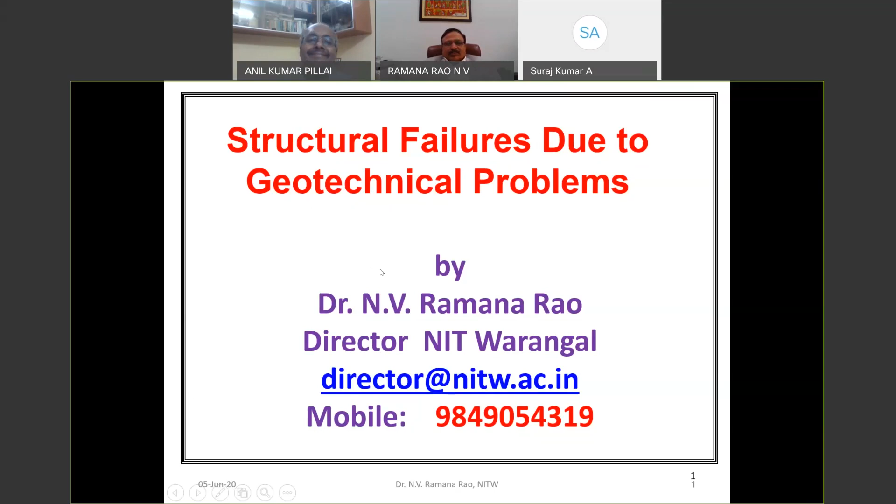So now when you say failure, generally we should all understand that it is the inability of a component, structure, or a facility to perform its intended function. So the moment we say failure, it does not necessarily mean that it involves collapse or rupture. Even if the functional requirement is not met, it is called a failure.

So when you come to civil engineering geotechnical, you can classify many failures, but as a part of my lecture, I have classified them: ground shaking, which is due to earthquake, shaking structures constructed on the ground causing them to collapse; liquefaction, which is conversion of formerly stable cohesionless soil to a fluid mass, causing damage to the structures; landslides, which are triggered by the vibrations; retaining structure failures, the damage of anchor walls, sheet piles, other retaining walls, and sea walls; and then settlement. So my lecture will be confined to these types of failures.

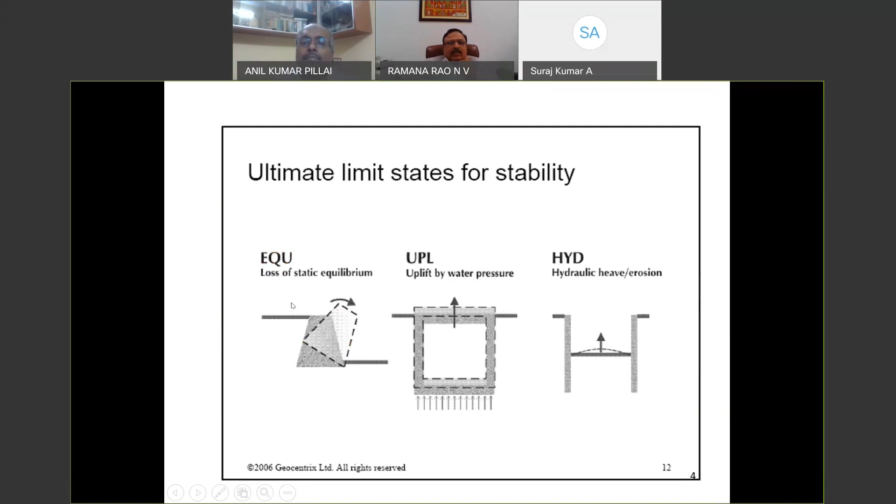So let us go to simple theories. We all know, but just to brush up some basic things. When we say ultimate limit states for stability, we have the equilibrium. So when there is a loss of static equilibrium, then you get a failure, or when there is uplift by water pressure, that is also leading to failure, or there is a hydraulic heave or erosion, which again leads to failure. Then we have the ultimate limit states of strength, the structural failures due to internal failure of the structure, cracks and all that. And then there is a failure of the ground, slipping of the cone and all that. So generally, these are the categories of failures that one encounters.

So before we go into the actual failures, I would like to throw some light on some historic failures, because these have given an opportunity to learn from failures. These are lessons for all of us. Most of us know them, so I'll just repeat it for the sake of continuity, but these are very historic failures and they are very important for any engineer to know. The first one is the Leaning Tower of Pisa. Most of you have heard about it, may not have seen it. This is a very famous failure.

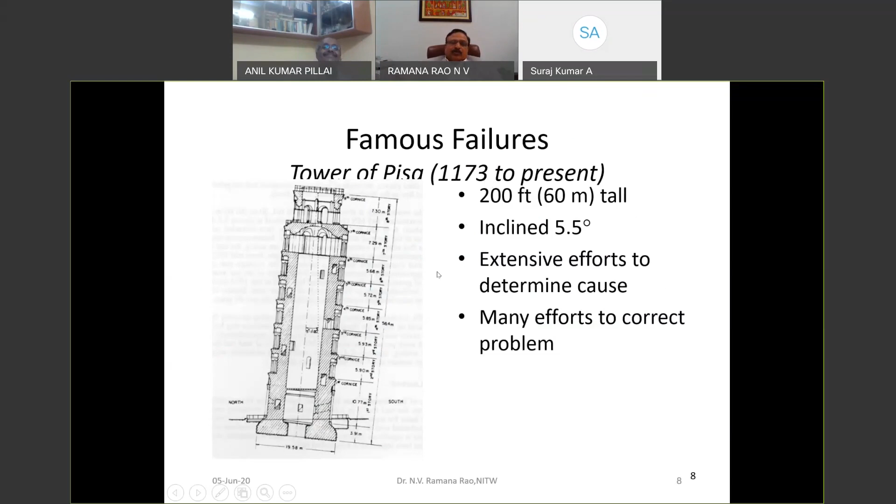This was in 1173 to present. It's 200 feet, about 60 meters. To be exact, it is 56.7. And it's inclined right now at 5.5 degrees. So extensive efforts to determine the cause and many efforts to correct. In fact, this particular problem itself has produced more than 100 PhDs worldwide. So the problem has created opportunity for many of us to investigate and think. So if you see, this is how it looks in the present form. A beautiful structure.

The evidence: the tilt of the tower was first noticed during the initial phase of the construction itself, which began in 1173 AD.

The detailed investigation has shown the soil profile, and there is a tilt because of certain changes in the sea level and the soil profile. Subsoil profile and soil properties, and all these investigations are made because as engineers, when something fails, we should not leave it like that, allow it to collapse, but we should go into details to find out what is happening, why it is happening, so that we can actually make it safe for future structures.

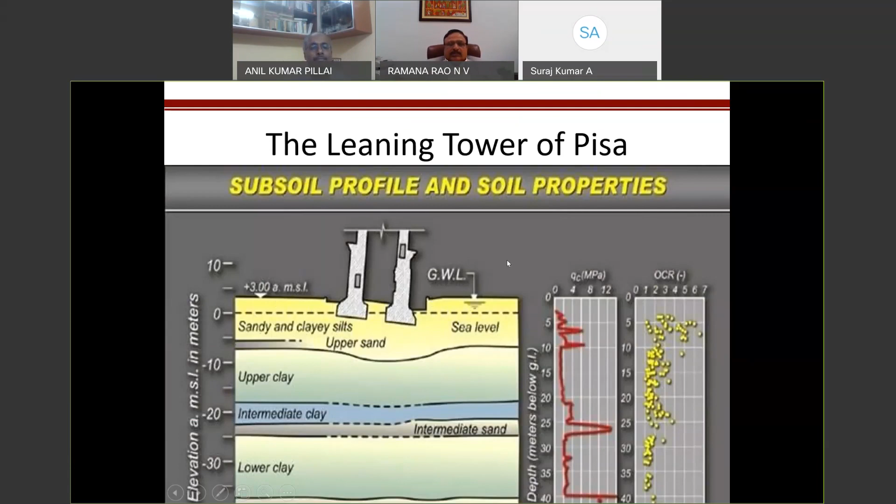So this is how it looks in its full form. This is one of the failures which is like a lucky failure, because normally failures lead to a lot of criticism, but this is one failure which has attracted tourists, and it has become an opportunity for the government to earn a lot of money. This is a lucky failure. Many of the failures are not so lucky, but this is a lucky failure. And you see a lot of tourists come, and the photographers take photos. So this is a very busy spot, and it is worth visiting.

But actually, the engineering says something about the subsoil profile. Then we have the normal failures because of earthquakes, how the ground is shaking. This is another famous liquefaction ground failure because of an earthquake. You see the amount of soil movement that has caused, because these are all historic.

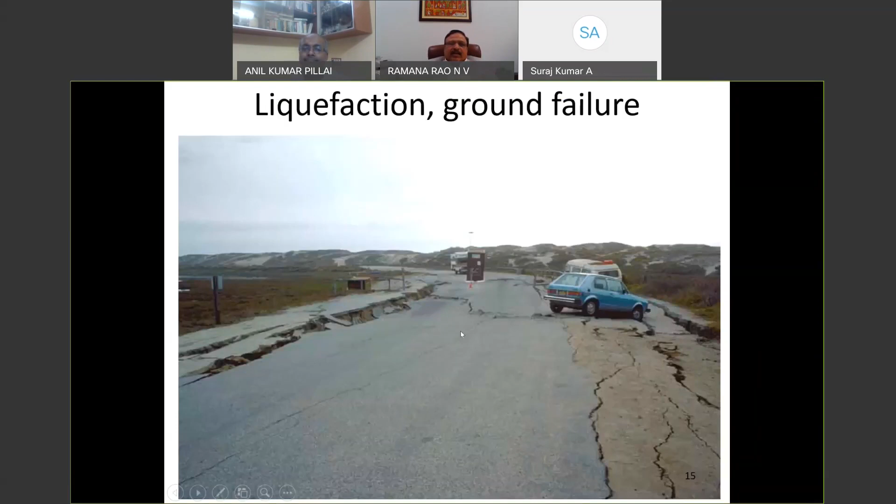Many of you might have already seen it, but I still thought, for the sake of completeness of the lecture, I would like to show this. So this is how there is lateral spreading in the soil beneath the embankment, which causes the embankment to be pulled apart, producing large cracks down the center of the road.

So the cracks are so big that sometimes a car can go inside. Sometimes suddenly there's an earthquake, you're driving, and you may go inside the ground. So you have to be careful, especially...

Very recently, due to liquefaction of the foundation soil during the Kocaeli earthquake in Turkey on August 17, 1999, which was magnitude 7.4, it's lucky that this building has collapsed but not touched the other buildings. Sometimes, especially in our cities, the buildings are kissing each other, and you can imagine the situation where one building falls on the other, and what will happen to somebody who is not even aware of what is happening.

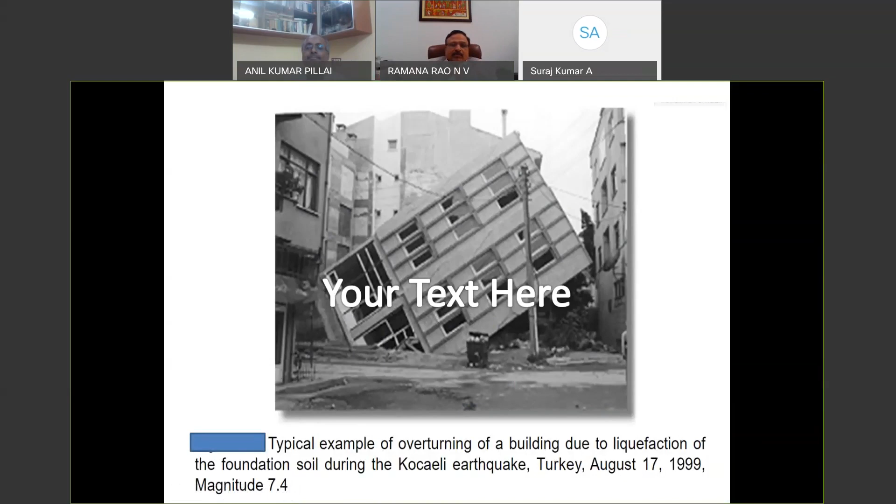And sometimes we come across cases where the foundation is not aligned properly, and then you end up in a situation—these are all real pictures, not animated—where you have to figure out how to solve this, how to build them.

Many times, I had the opportunity to visit the Channel Tunnel during its construction. This Channel Tunnel, which is a tunnel under the sea, from the UK side and the Paris side, they approached from different sides, but the alignment was so perfect that they met with not even a 10 mm difference in the alignment. So alignment is very, very important.

And these are some of the punching failures of the foundation leading to collapse, and other lack of proper investigation leading to failure of many of the bridges. So very, very important—every aspect of engineering is important.

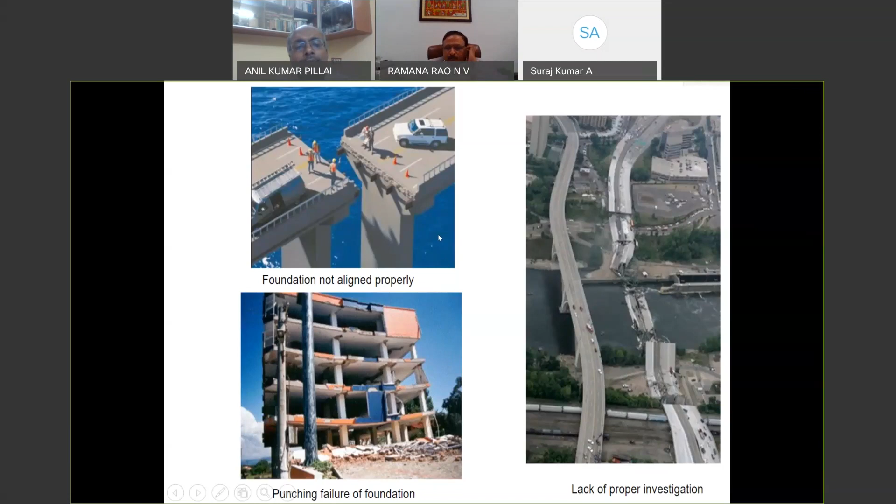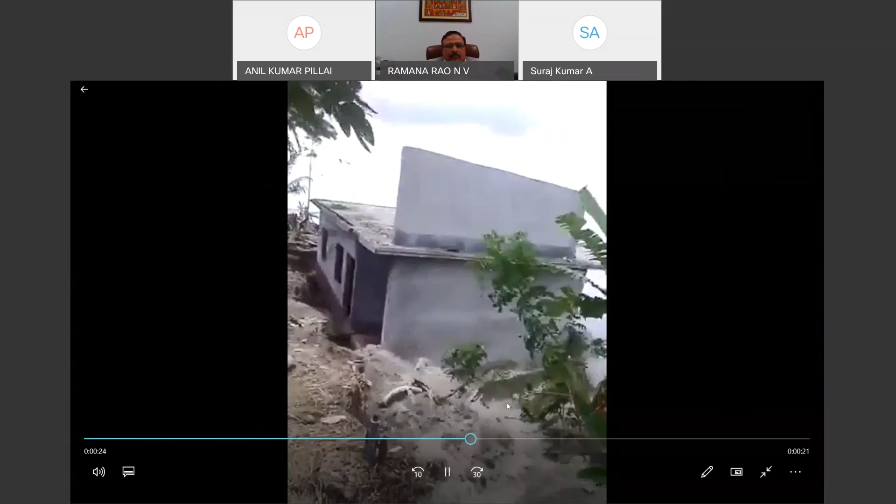Then you realize that nothing is there at all. So that is how we have to be prepared for all these. Don't build so close to the water table, and we should be aware of water table fluctuation, because that is one major cause of failure.

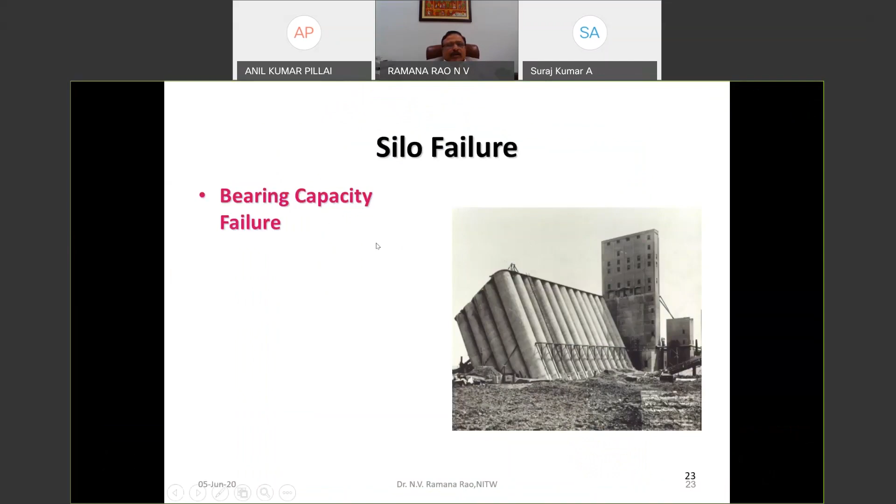This is another historic failure which is taught everywhere. It's a silo failure, actually a bearing capacity failure. If you see the probable sliding surface, this is how it is, and this silo failure is because of inadequate bearing capacity. So this is a typical example of a bearing capacity failure.

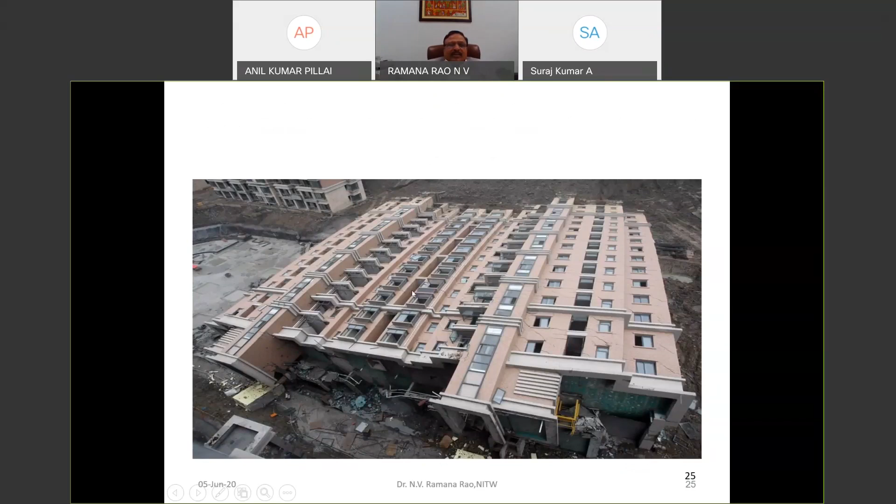And of course, this is another famous failure in China, where the building just collapsed. This is how it looks, a tall building that collapsed. The fellow at the top, if he wants to come out, simply has to jump out. So that is the situation, you see he is not aware. This was a typical building; other buildings are safe, same design, everything, but this particular building collapsed. So proper investigations were carried out.

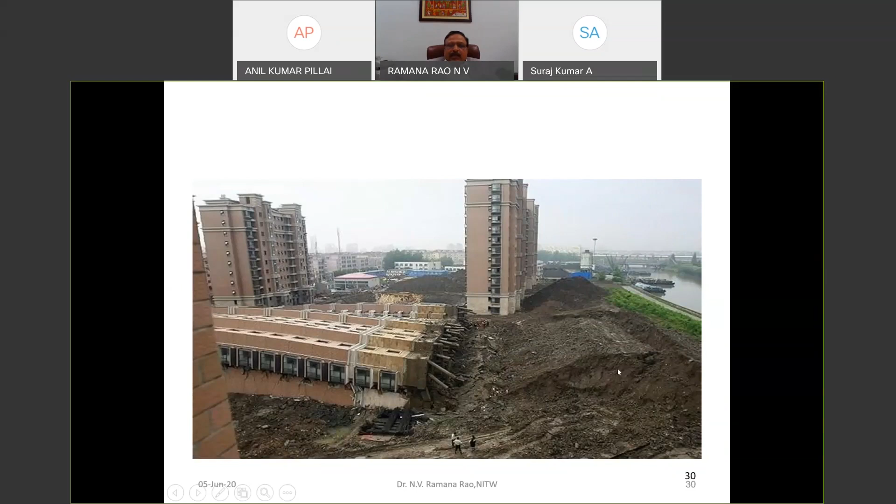When you do a close investigation, you find the foundation system, everything is fine. But there are some reasons which you have to be very, very careful about. This is the collapsed portion of the piles and other things. Here, the important part is the excavated material dumped here. So what really happened in this particular failure? Let us see, this is how it looks.

So let us see the failure pattern. This is how the arrangement of the foundation system is. Here there was a canal that was excavated, so they excavated all this material and dumped it here. This created additional surcharge, and on that day heavy rain came. So the surcharge started exerting pressure on the piles, and finally the piles cracked here. After that, immediately it broke and then fell. So that is how the failure took place.

So there are some things we are not aware of. When you are inside, as engineers, we should tell them every aspect is important. Even a minute mistake will create a huge problem. This teaches us many lessons, and it is recorded in many textbooks now because it's a famous failure. We should be careful not to just dump material anywhere; we have to take care of the engineering aspects of it.

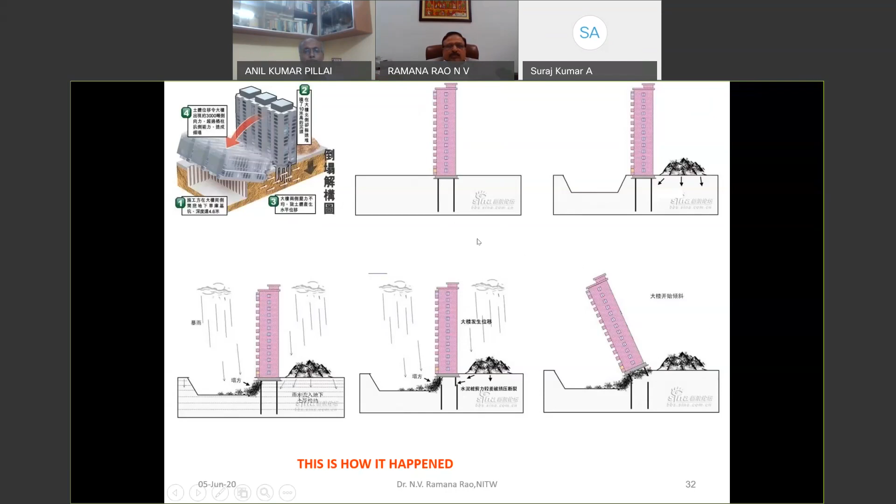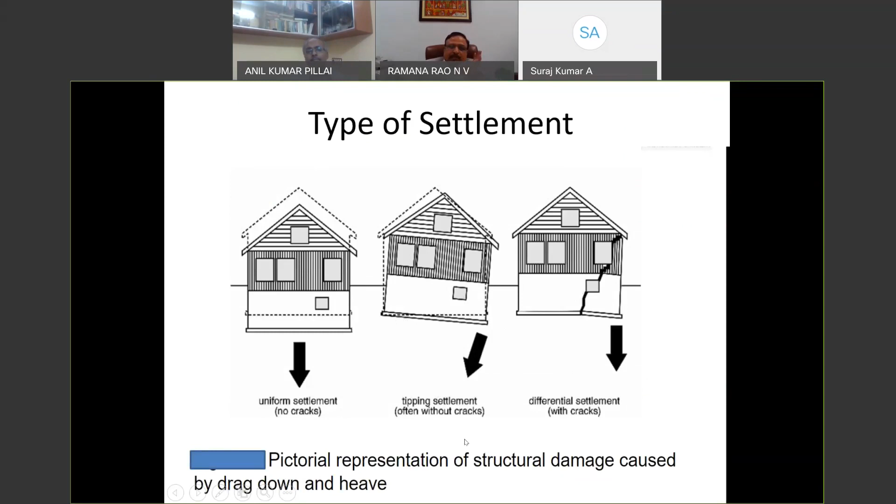This is a pictorial representation of how settlement causes damage through drag down and heave. This is only for illustration purpose, because I am addressing an audience where some are students, so I'm trying to go to the basics, because it's always better to revisit some basics which will help refresh our knowledge.

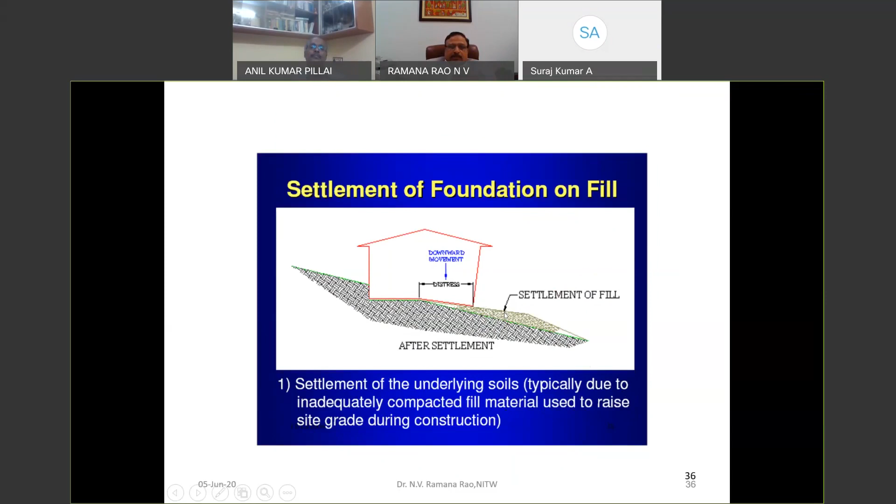Settlement is something very, very critical. Settlement does not come immediately - you feel you are compacted properly, but once there is a fluctuation in water levels and weather, then settlement of the underlying soil, typically due to inadequately compacted fill, is a common problem during construction. So compaction of the backfill material is also very, very important. Many times when we design, we make an assumption - this is our assumption in the design.

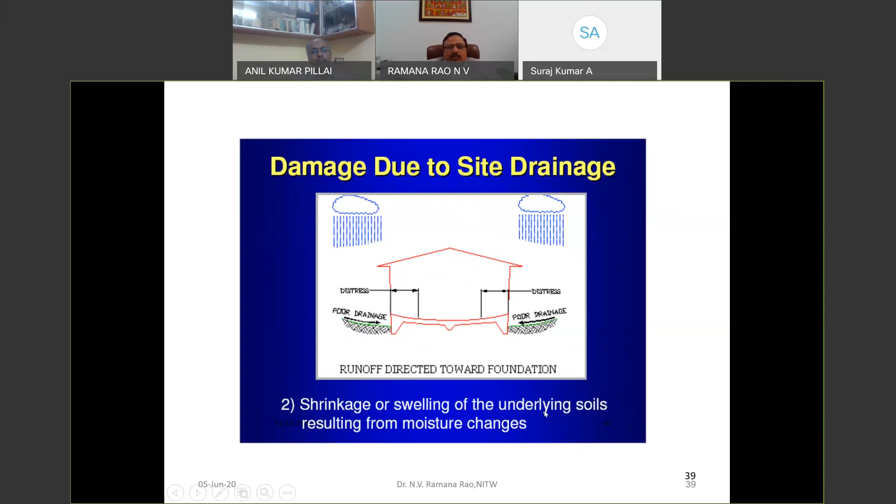The shrinkage or swelling of the underlying soils resulting from moisture changes is something again. Many times you find building damage due to trees planted very close to the foundation. Today is World Environment Day, and I say don't plant trees, then people will come back firing at me. But I'm saying plant trees, just away from the building so that the roots do not disturb the foundation.

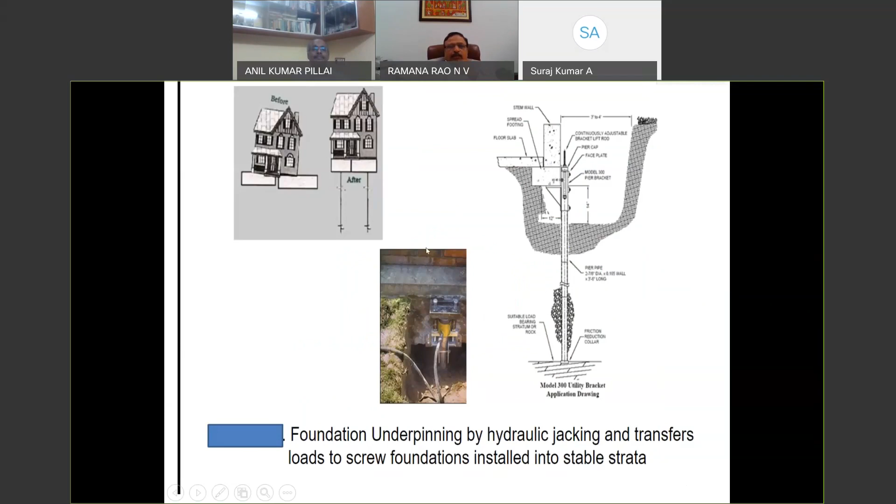These are some of the cases which I have dealt with as a consultant. Whenever there is a failure, they call me - so they call me the crack professor. Whenever there is a crack, they call me, so I go there. This is a settlement of the floor.

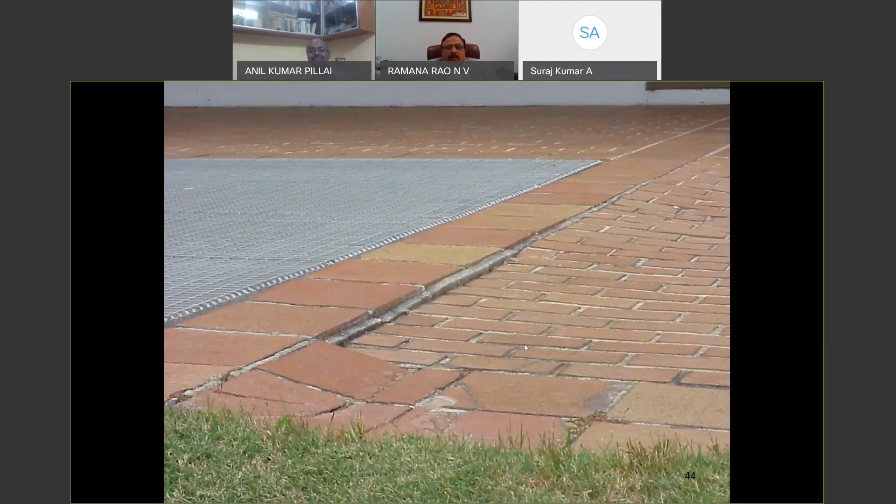This is how the floor has settled, and they don't know what happened. This was after huge rains. Luckily, the designer has taken care that the foundation and column are proper - it has not settled, but the filling of the pavement and parking lot clearly shows obvious movement. Anyway, the building is safe, but the moment something happens, immediately all the residents come out onto the street and start shouting. This is something which can be easily avoided had proper compaction been done.

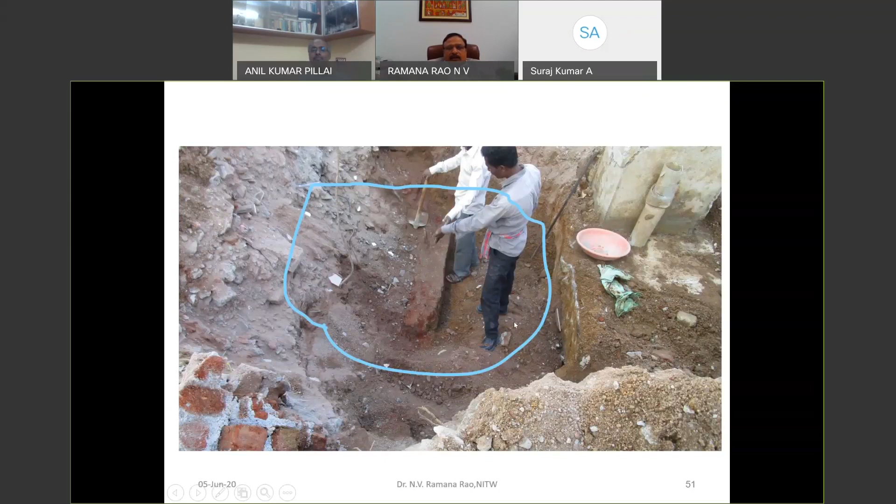Then there's Nanakramguda, another place in Hyderabad where there was a failure. This was a 4 or 5 story building, and I was asked to investigate. I found that they had a sump built with brick wall very close to it, and this sump always used to leak, so the building was totally wet. The more deeper you go, you realize there was a bore well which had gone to the foundation. These are all engineered buildings, but the site engineer never visits, and the designer never visits the site.

This is how the foundation was built, because this adjacent property belonged to somebody else. So this is how our execution happens, and nobody bothered to visit. Finally, structures don't listen to excuses - they behave the way you construct them. And that is what happened. It collapsed, leaving half columns and half structures, and several people died.

Many times we need to make sure that we tie the reinforcement, even in the foundation - this is a typical example for illustration purposes. If you don't tie, what is going to happen? And if you tie, how does stability improve? So to increase stability, always tie the stirrups all the way down the column.

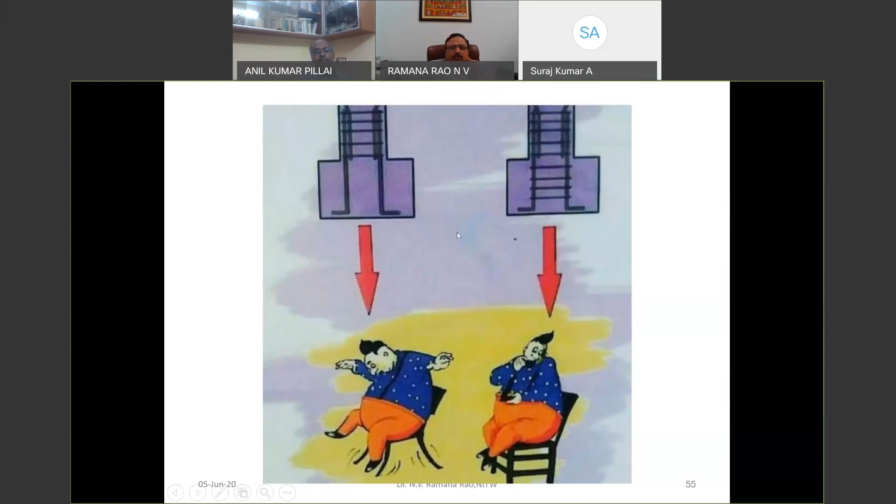See, what is there in theory and what is there in practice is a big gap. And we as engineers have to make sure that this gap between theory and practice is bridged. There's a saying on civil engineering sites: weep holes never weep. So we have to make sure that weep holes weep by properly grading them, because the purpose is to relieve the pressure. Otherwise, you will see what happens.

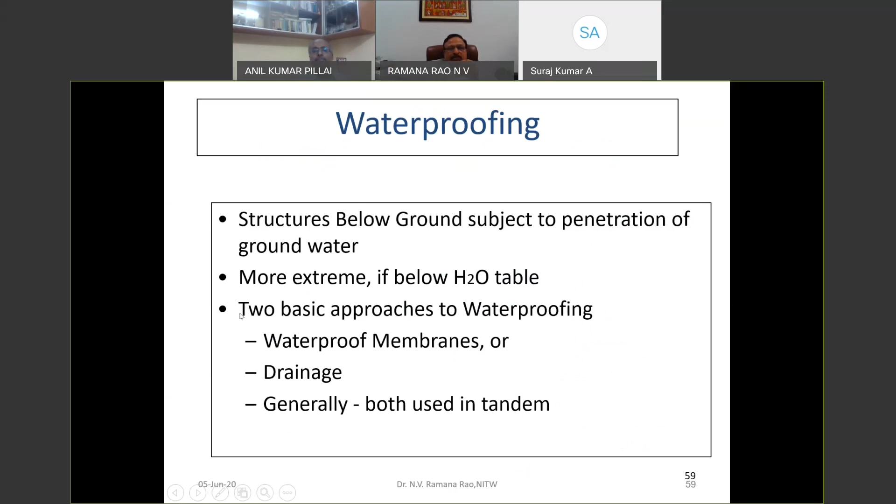Then there is overturning, and you have other mechanisms to prevent it. Waterproofing is also very important. Sometimes we ignore it, but structures below the ground subject to penetration of groundwater will require waterproofing. Two basic approaches are there. Several technologies have come now, so I don't want to go there, but this is a simple way of doing it. Because we are now going for very deep cellars, we require these retaining walls, but we also need to take care of the other side to prevent any failure. Proper drainage should be provided so that there is no saturation creating problems in the cellar portions.

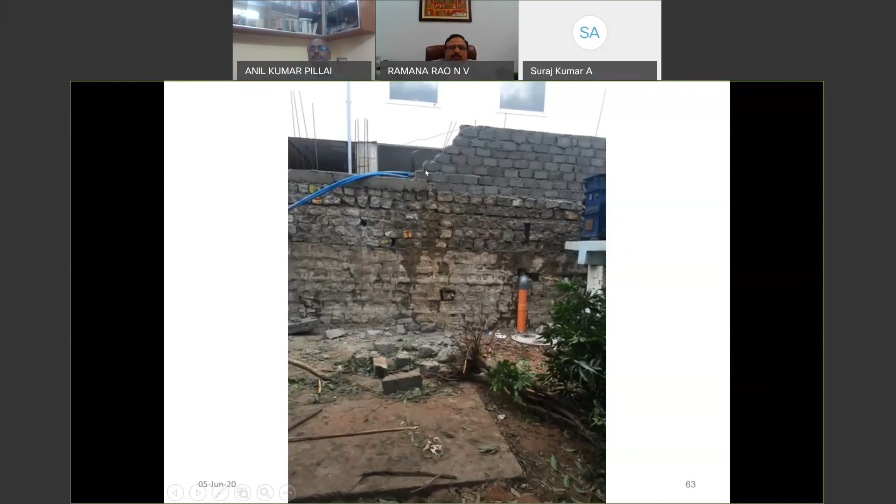These are some of the materials that you have. Now I'll tell you about a retaining wall failure. This area belonged to somebody, and they had a newly constructed building on the other side, which you can see. When they were doing the parking lot, they dumped all the material on this side without realizing that this was originally a compound wall. It was not a retaining wall. And as the excavated material increased, they increased the height with a normal wall.

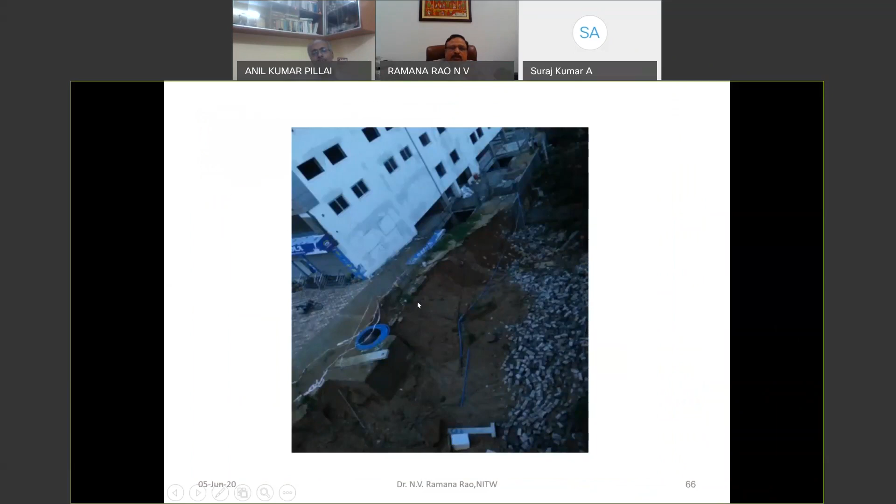This is how the top view looks. So we have to be careful about how we are constructing. Site visits are very, very important at every stage, and we should not do things arbitrarily. This is the case study I was telling you about, the collapse of a retaining wall at the minister's quarters. Minister's quarters are supposed to be very important, and everybody takes care; a lot of visits had been done. This is how the collapsed portion looked. You can see the huge crack.

See, this is what I'm telling you. Huts are built immediately. There is a wall they get free of cost, so they build huts adjoining it, and you can imagine the situation of the hut in the middle portion. Obviously people die, it creates a lot of controversy, and this is what happened. Here the fault was with the designer, because he had used a shelf technology and his assumptions were wrong. He thought the shelf would prevent overturning, but the compaction was not proper, and there was a gap between the shelf and the soil, so cantilever action came, and wherever the shelf was there was a huge crack.

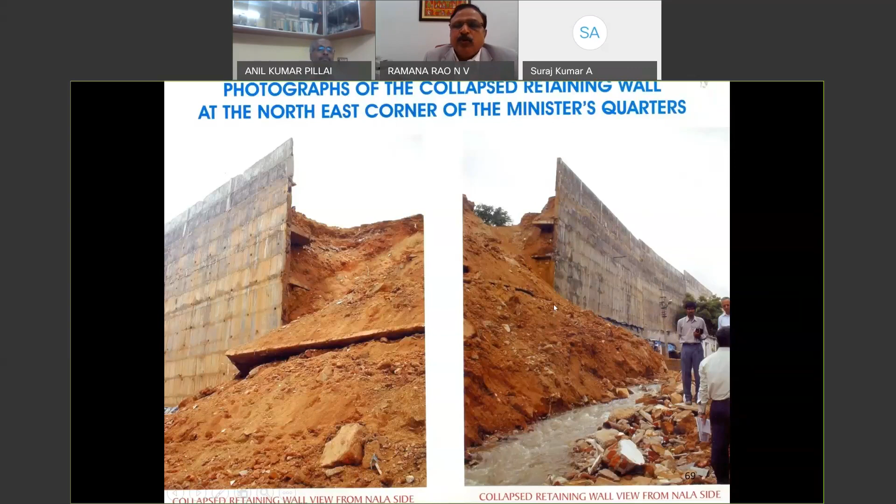The weep holes were there, but they never weep. You can see the weep holes are shining; there is no indication of any water leaking. And all these problems come up only during huge rains. This is the closer view. Everything was filled with very good soil, but failure still occurred. You see, these are the small weep holes. Sometimes they are blocked.

But the adjacent old wall with this sort of arrangement never failed, because the water seeped through it and went away smoothly. The one built with RCC failed. After that we did a lot of forensic engineering; here I am standing and watching, and then we gave some reports. Everything is done systematically, but the basic assumptions of design should be met at the site.

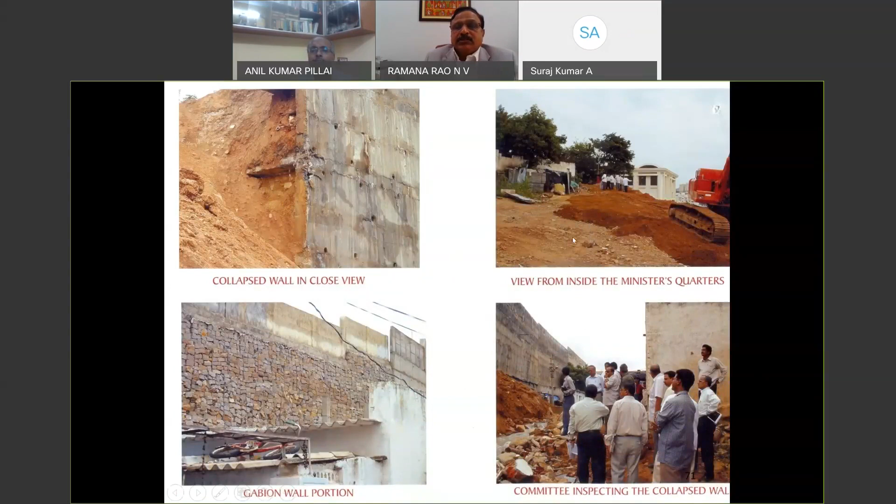Otherwise, your designs may create huge havoc. So these are some of the other views. And then we do a lot of investigation, inquiry. So this was a huge amount of filling. And what happened, unfortunately, they have taken care here, and here they built a wall, as a compound wall for the ministers. So this compound wall is about 4 meters high.

So all the water came and collected over this. So you had a 4-meter pond on this wall, and that created additional surcharge and lateral thrust, and led to the failure. Actually they had holes, but the residents below, every time the water used to fall on them, plugged it with some mechanism and prevented the water from seeping out. And this has led to the failure of the whole retaining wall.

So this is again a design assumption mistake and other things. And then we do analysis, we do all the system. We now have software where we can do detailed analysis of why it failed. But everything, the reinforcement, everything was perfect. But then the construction problem was there.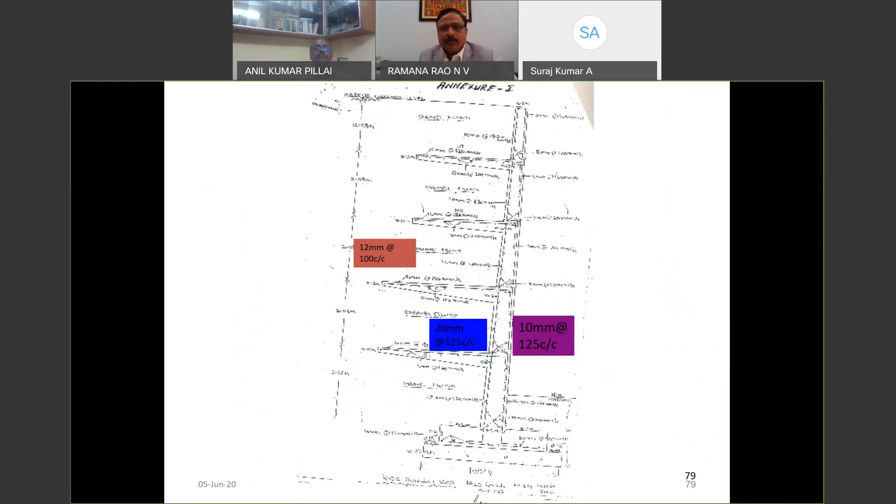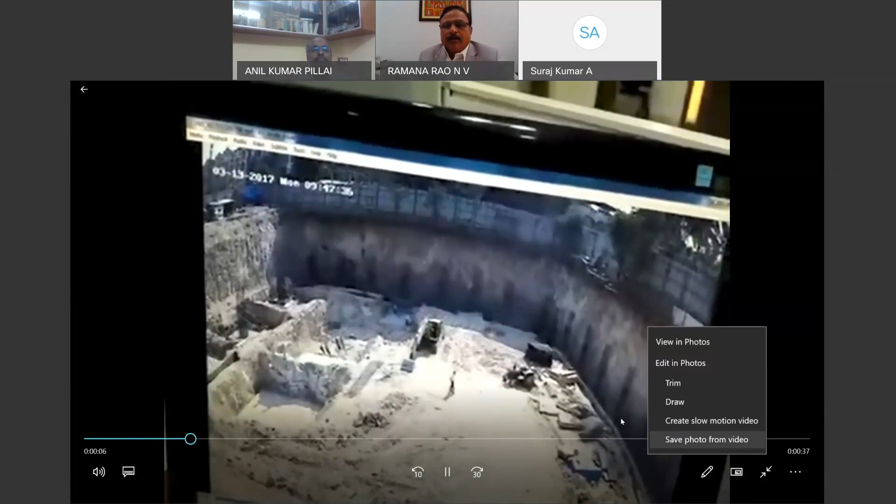And I'll show you the sequence of the failure, how it looks. So the video comes. So just see this corner, the corner on this portion. This is the portion that actually needs to be watched. Just see the corner, you see how the whole thing has collapsed, and this collapse has led to the failure, and the people who were there.

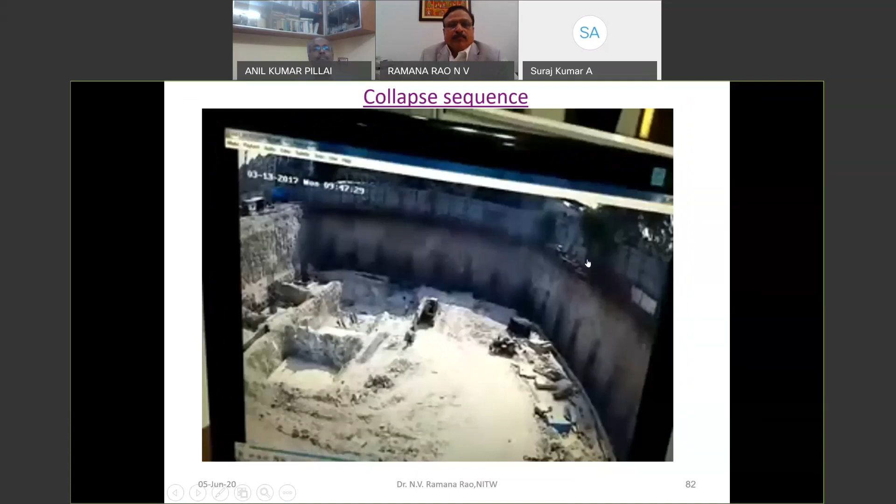So let us see how it actually happened. So this is how the collapse looks. And then, as you go on, it looks like this. On the top side, there is a road. They dumped a huge amount of steel, huge weight, concrete, all the material was dumped there. And immediately on the road, there was a horizontal crack. This itself is an indication that there is a movement of soil, but nobody observed it. Nobody bothered to actually make a note of it.

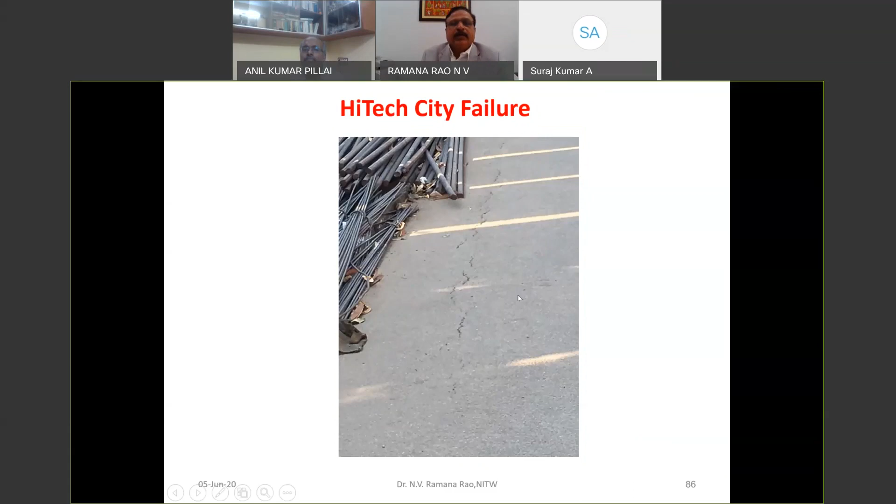And then you see, this is another example of how they have taken care to prevent failure of the retaining walls. See, in the previous case, the soil is very good, but still it failed. So normally, when you're going very deep, you need to have proper measures, because the contractor is always interested in profit, and he ignored some of the basic steps. So the engineer should insist on such things, otherwise it may lead to failure and give a bad name to the whole engineering community. Now, this is another example of a situation where you have a

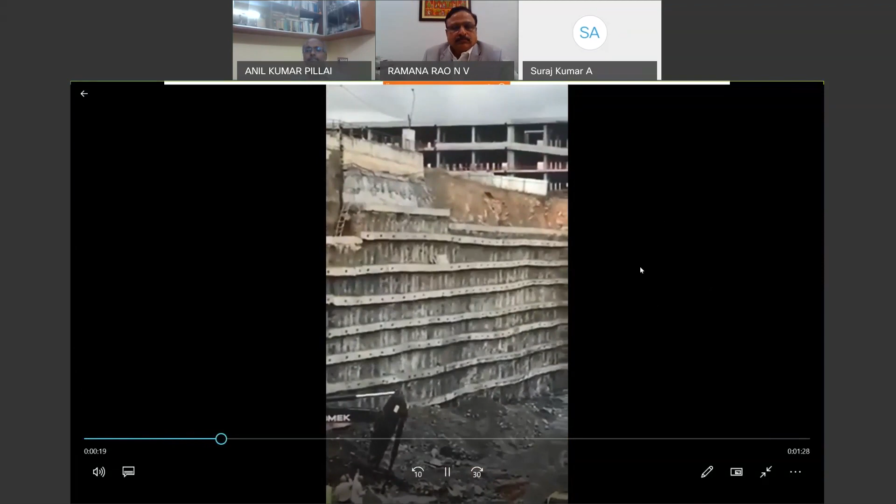this is a failure. Just observe the failure at this portion of the wall and how it led. Everything is there, the retaining wall is there, but it has led to the failure. Just see the amount of damage.

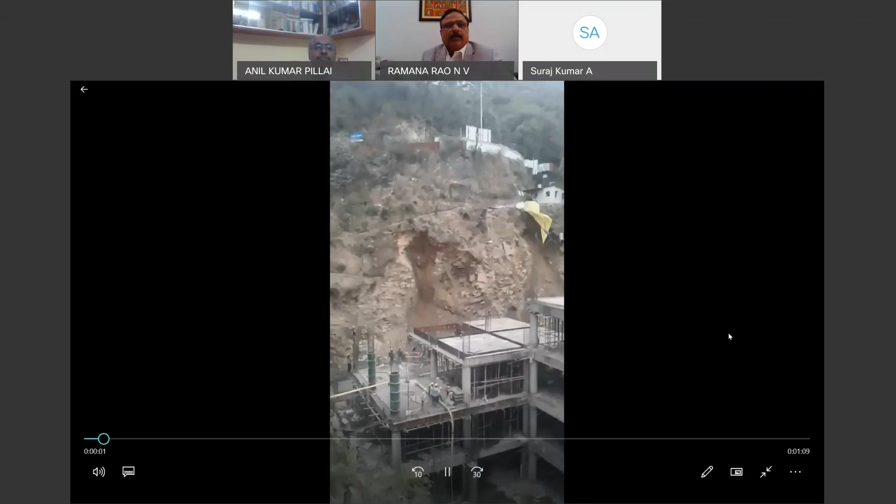So what this example shows is that even if you do it properly, and they have to do it properly, this particular failure damaged the buildings on the upper side also and led to many things. So you have many examples of such things, and landslide is another common thing. Of course, here we don't have to worry, but in many other places we have landslides. This is another example of a landslide. You don't imagine it, but you can see the effect, how the buildings have failed.

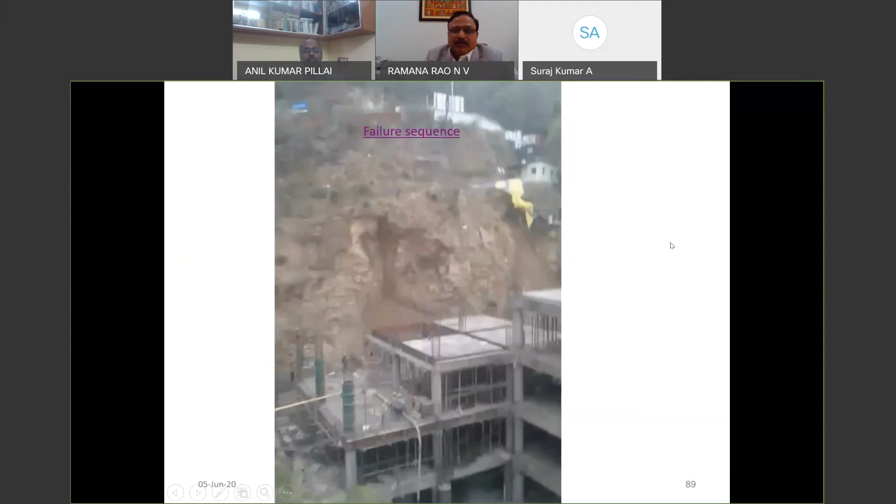So some of these cases are very scary, but this is how things are, and you can see how a landslide can create havoc for buildings. So you have to be very careful the way you put it. You have to make arrangements. So this is another failure which you don't anticipate, especially on hill roads, and how it fails.

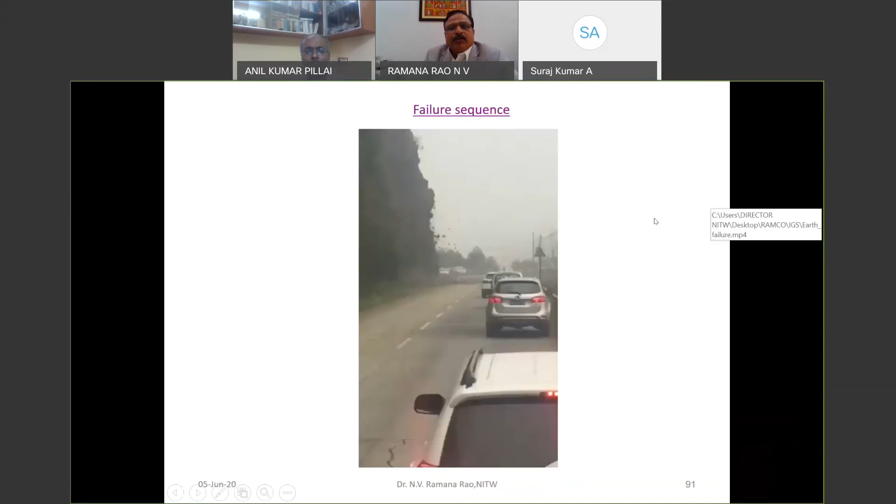Then one more failure I wanted to show. You see it, but you see the impact of it.

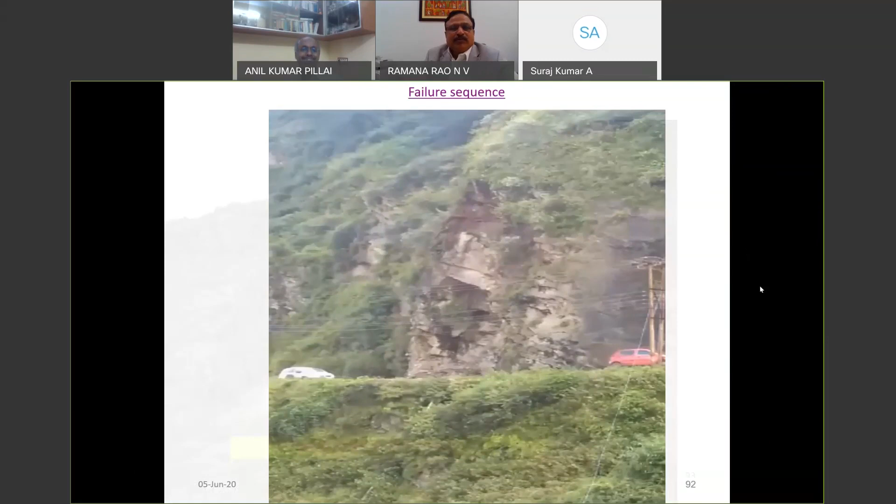We have to be careful. I don't want to scare you further with any more videos, but okay, this is another example, where we try to break the rock, and when you are breaking using explosives, you are creating unstable rocks after blasting. So this is a very common problem.

So we had one such system in the Durga temple in Vijayawada. With the rock, we had this sort of arrangement. Later, we tried to come out with a system with one of the consultants to do anchoring and stabilize with the help of a mesh. And today, this is how it looks, pre-stressing the cables and holding. Using some of the concepts in structural engineering, we have stabilized these rocks, and today it is very stable.

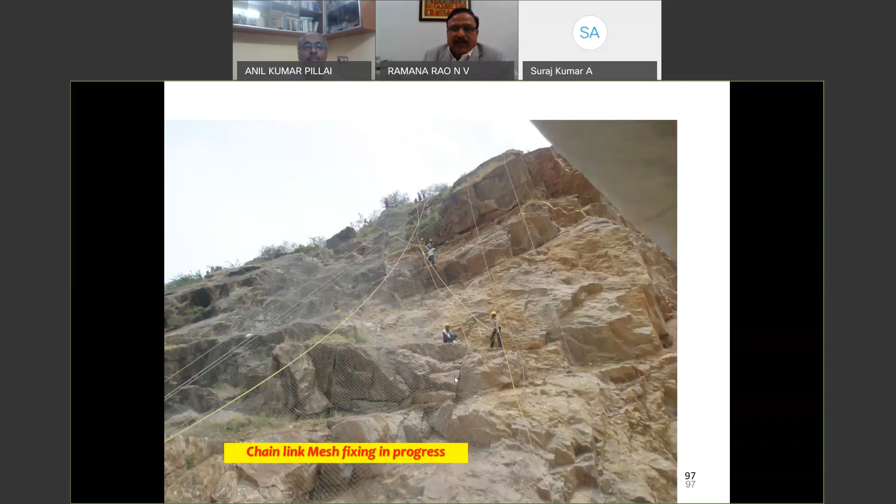This is how it looks. I don't know whether you had a chance to visit. These are also pre-stressed cables, and it's perfect. It was done about 10 years back, and till today, in spite of several things, heavy rains, nothing has happened. So we need to think of innovative solutions to solve and make these things work.

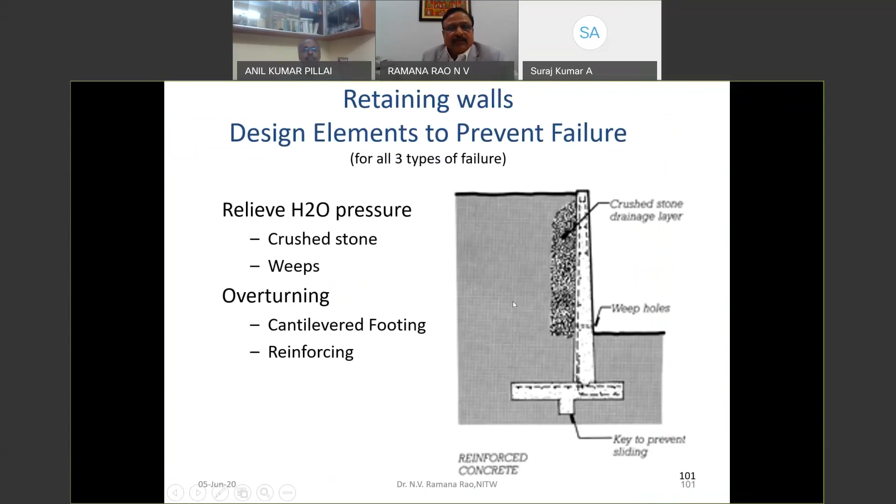This is the hill where it goes to a temple, and imagine that failing. So we have to make sure that we take care of all the important things, otherwise we lead to problems. So the type of retention system that you design should depend on how close you are building, what is the type of soil, what is the water table level, whether it is temporary or permanent, or what is the contractor preference.

Because there is a cost which may not be included in the estimates, and many times cost is a key consideration. So here, you can use good materials for waterproofing, which are coming in the market. If you have sufficient space, then you can do bench excavation. But normally in cities it's not possible because you are building very close to each other. The bench is so that you can prevent soil slipping and falling.

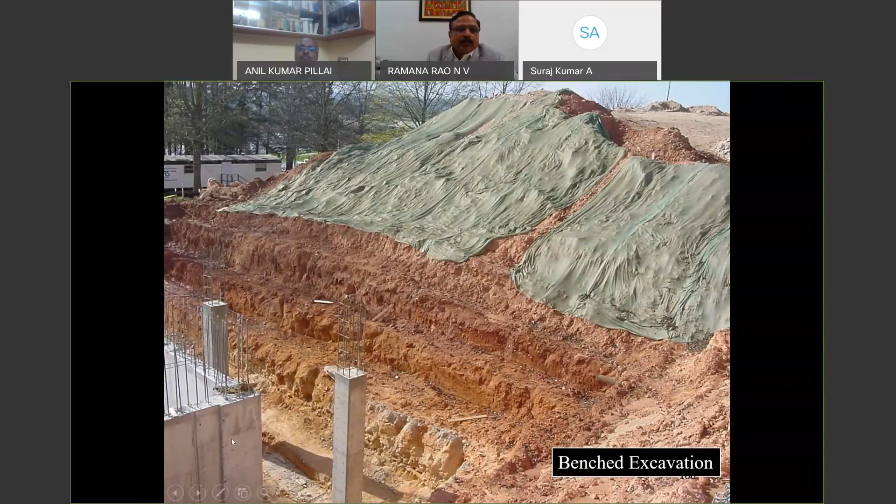But all this involves cost, and the contractor says this is not a part of his work. And if you don't do it, this building will fail and fall and create many failures. So many times the retention system of the surrounding wall is very, very important. Several examples are there in the city; for the sake of illustration, I have taken only one or two.

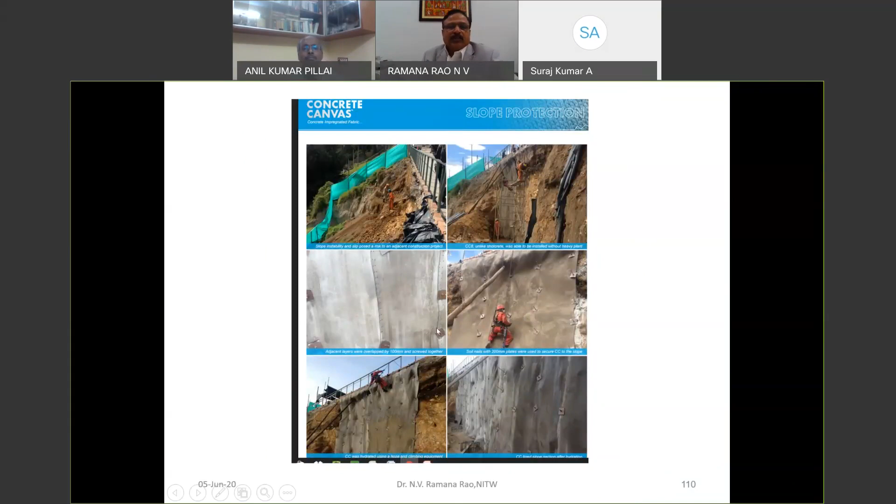Luckily we have good techniques available like soil nailing where you can actually stabilize many of these things. Or recently, concrete canvas has come where you can stabilize slopes. So technology is there for slope protection, but these involve cost. If this is included in the work cost, then obviously it will improve the safety at the structural sites. So this is how slope protection using a concrete canvas looks, and it is a good option.

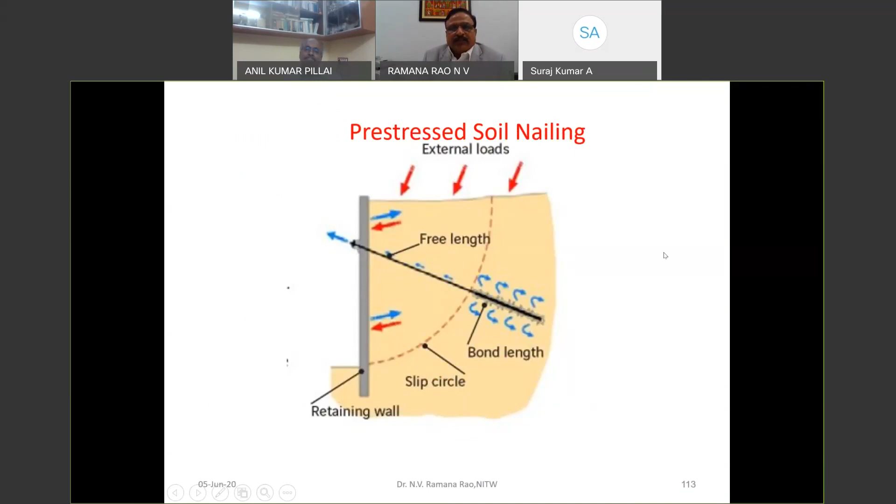Otherwise, you can do the nailing. This is how the nailing looks. Of course the theory is there, the friction and all that, which is a very interesting concept. And this has been done after the failure occurred, and we find that it has stabilized many other things.

Because the properties are so close to each other, and the more high rise you go, the more rental property you get. So you cannot stop them. The municipality also cannot stop them for various reasons. One builds 20 stories, the other builds 30 stories, and then all the additional problems come.

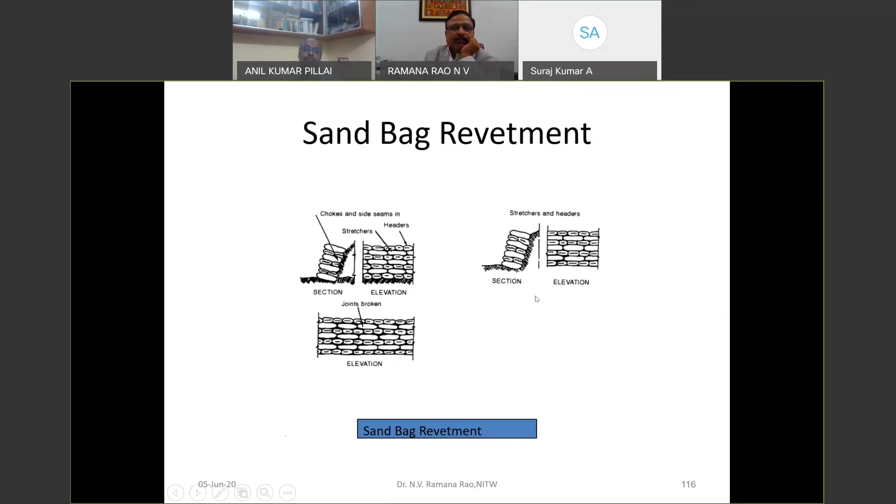And then you can have a geotextile filter layer, and then put the sandbags. This will prevent many of the failures. What is important to note is the orientation of the bags. The bags are horizontal, vertical, and so on. This is how it should be done, not in the same direction: the first layer in one direction, the other layer in the transverse direction. This will improve your revetment.

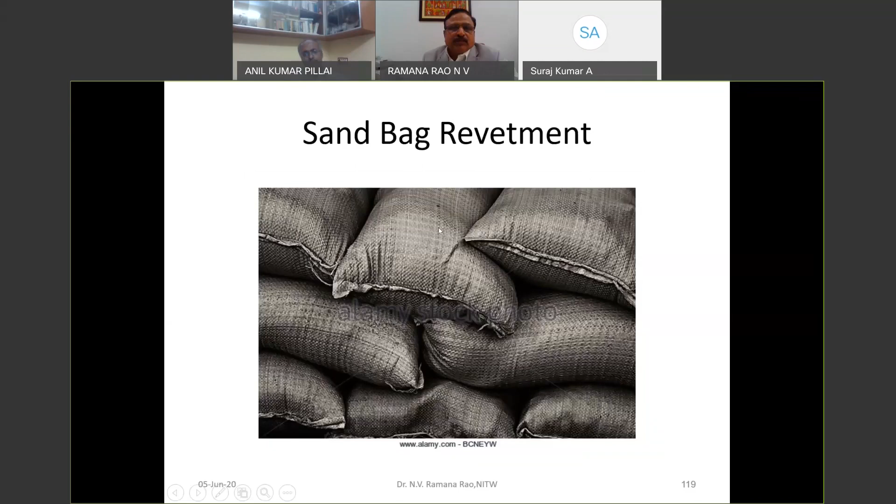Or you can go for conventional gabion type of walls, which is a very good option, and most of the bridges do it, and it will survive. It is very safe and stable. Or simple reinforcement. All this costs, so people tend to avoid it. These are some of the examples which I thought I will share.

And there are some other site-specific problems which many of us have to be aware of. Not just design the site and then go away. Because here, this is a typical case again in Hyderabad, where there is a metro station and where they have built a huge complex. So they went well below. This is in Punjagutta, and they had many boulders which are loosely placed on one another.

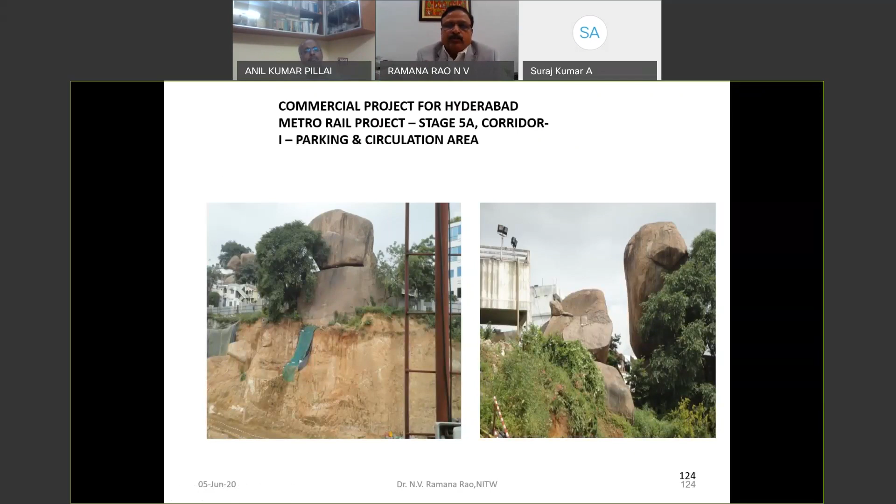You can imagine a situation when there is a small shaking due to some sort of earthquake or some sort of vibration. What is going to happen is that the stones will roll. I'll show you the closer view of how the stones are looking. This is where the building is, and these 1, 2, 3, 4 are the actual locations of the stones. You see how precariously they are placed. So any small vibration can lead this stone to fall.

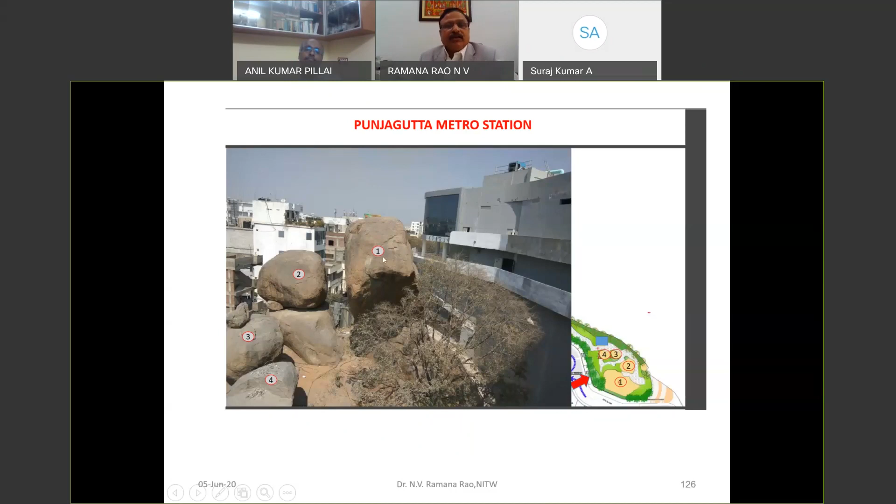This is the compound wall of this building, and if this huge mass falls on the building, you can imagine the fate of the building. And this is a busy metro station in Punjagutta, and it may cause damage. But luckily, we had to take the geometry, do the center of gravity analysis and all that, and we found that it is quite stable. And of course, then we suggested some simple measures. This is how the rocks are there.

They are on a slope, and you can see the massiveness of the rocks. So these are also things which one should take into account. Not only your site, what is in and around your site is also equally very, very important. You want to make the structure safe in the long run, not just build yours and forget about it. Because in the coming future, what is going to happen, nobody can estimate. And that is it. So what we suggested, finally what they did, we don't know.

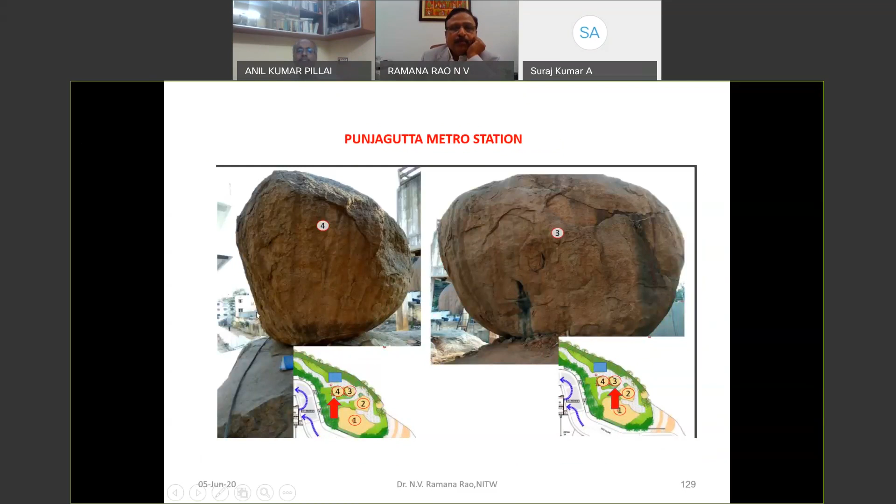So this is how the rocks are placed. A closer view, and there's a small mud and all that. So we asked them to grout all this with the proper epoxy. This one, even the inclination is so dangerous that the center of gravity is shifted. Then we asked them to grout, and then later we asked them to tie with a prestressed strand, HT strand, all around it, and we connected this. We suggested that. Finally, what they did, we don't know. They never called us again.

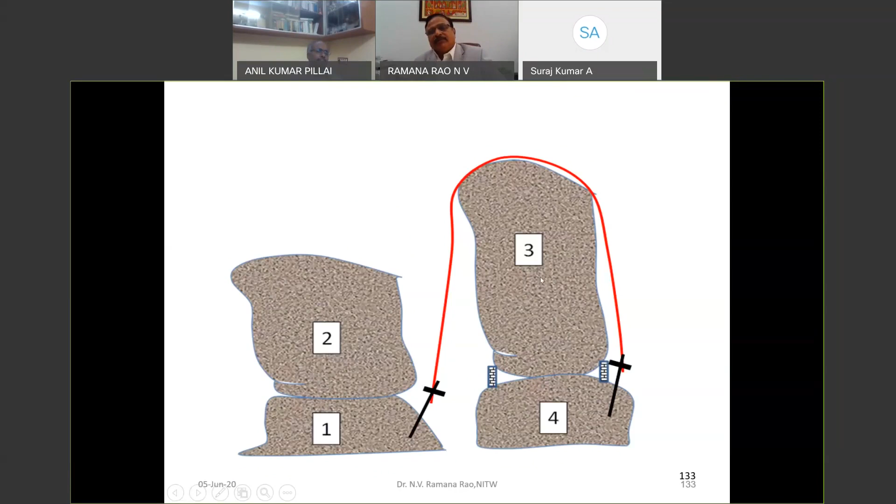But right now it is stable because they have plugged it and locked everything with the epoxy, removed all the water through jet. But these things we have to take into account even while construction, while design: the site, the type of soil, surroundings. It's being done, but we don't do it on a regular basis, so we have to be very careful. And we also packed this with some concrete so that there is no possibility of slipping. So the structure is safe now.

Recently also there was a failure of the supporting system, so we cannot ignore it. This is also a small duty. You have to make sure that the base is properly resting, that there is sufficient bearing, and that there is a sufficient locking arrangement so that slipping does not take place. So we have to make sure that each scaffold and scaffold component must support without failure its own weight and at least 4 times the maximum intended load applied or transferred to it.

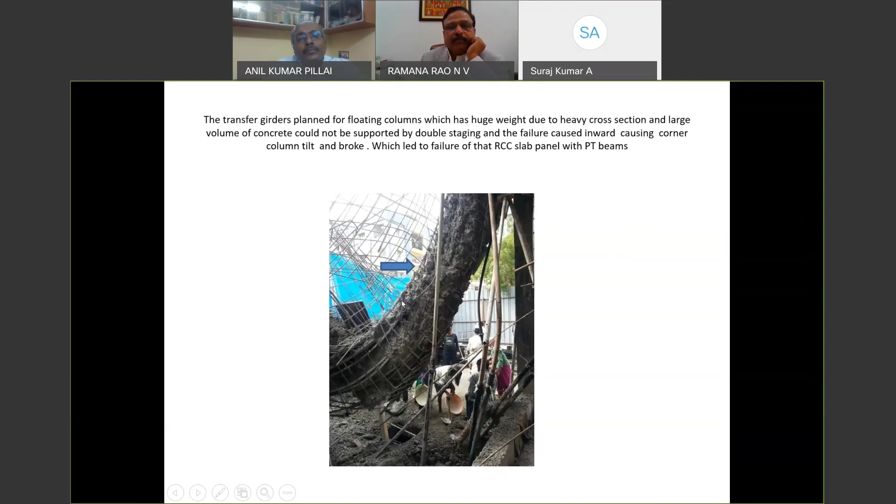And the transfer girders and all these things, and huge collapse have taken place. And this is the top view of the thing, how it looks. And it creates a bad image to the engineering community in general, and to the builder. Many times, when there is a failure, the failure is an orphan, they say.

So nobody takes responsibility. The site engineer says, my design is all right. The design engineer says, the site engineer says, everything is okay, sir. You have also come and verify. But you have to be very careful and have an all-round view of the thing, an integrated view of everything, and then we can avoid many such failures.

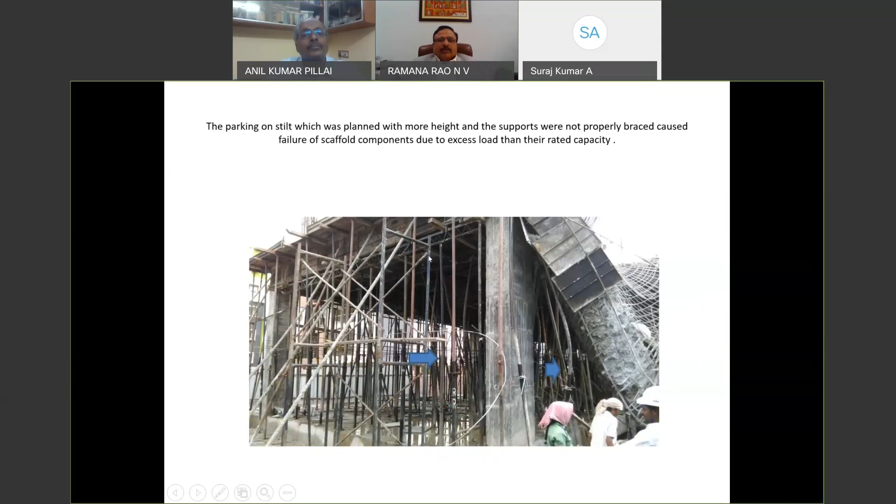And this damage has delayed the project by more than 5 years. And then it affects everybody, the residents, the owners, the purchasers. So we have to be very careful to avoid these type of failures. And this is how the closure looks, the massive things. So again, all these things are very distressing for an engineer. Once you conduct an inquiry, you find a hundred and one problems.

So this is another failure which I was connected with. This is a famous club in Hyderabad. It's called Film Nagar Club, where all the film stars come and have a nice dinner or whatever you want to call it. So what happened here, somebody came up with the idea, why not have a portico? There is nothing wrong in it. So they had a portico.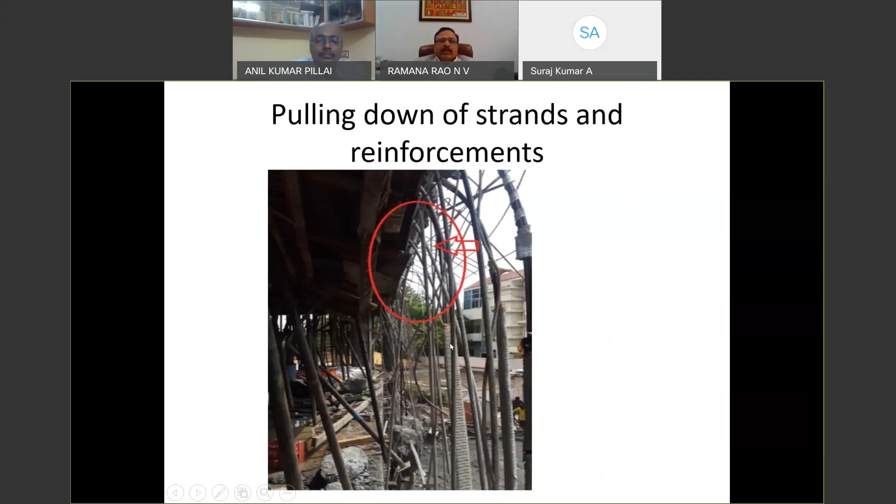But then again, this was the arrangement of the structural beams and all that. But then the support systems, which were used to support this slab, were all loosely connected and not done properly, not properly rested. And this led to the total failure of the thing.

And unfortunately, failure may not be bad, but because of this failure, if it kills innocent persons, then it creates a lot of pain and a lot of trauma for the client as well as the owner, because a police case is there, a criminal case is there. So there is always a danger of these sort of problems that one comes across.

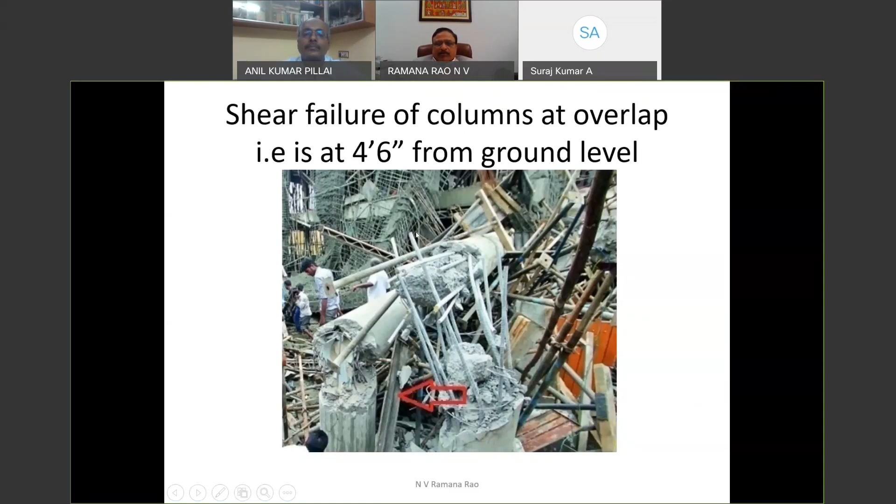And then all the other things come out, that you find later there's no proper lapping, this, that, whatever common mistakes we commit in site, all will get exposed. And of course, nobody's perfect. This is how the situation is in site immediately after.

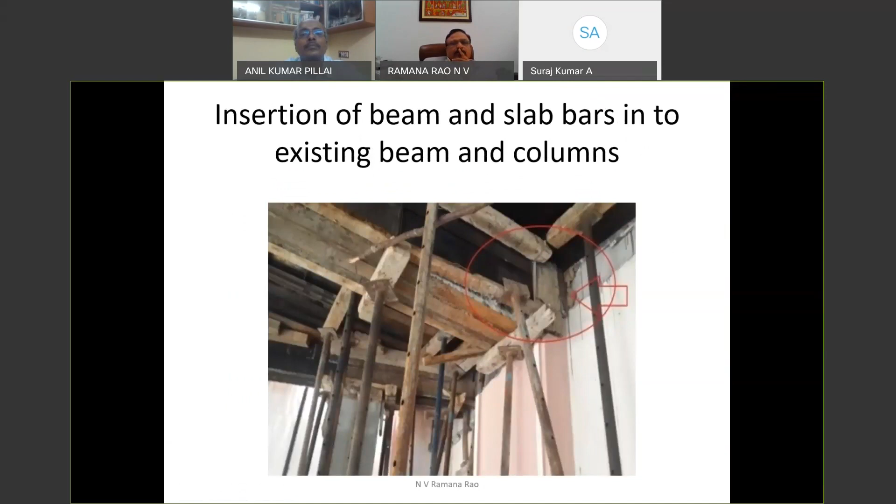Then we asked them to remove it. But all this is not a good sign for an engineer, at least for a bigger work, where many important people visit. So you can see how the support systems are damaged, slipped, then buckling. All these things happen, which we can easily avoid.

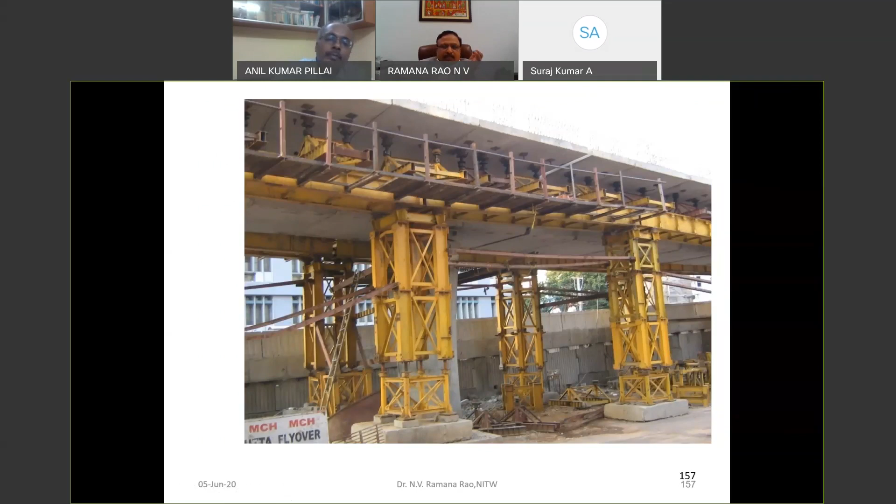And the contractors didn't observe the compaction properly, and they placed half on the good soil and the other half on the bad soil. And this is how it is. Here you see there are two pedestals. Here one pedestal. Here one pedestal. Load is same, of course. And here only one pedestal. Here again two pedestals. So see what happened now.

This is on the other side. Because of heavy rain, this particular filled-up soil which was excavated got settled, and the support system tilted, the pedestals tilted. After the load was placed, that also led to the shifting of the segments and then falling of the segments. For no fault of the engineer, for no fault of the designer, these things happened.

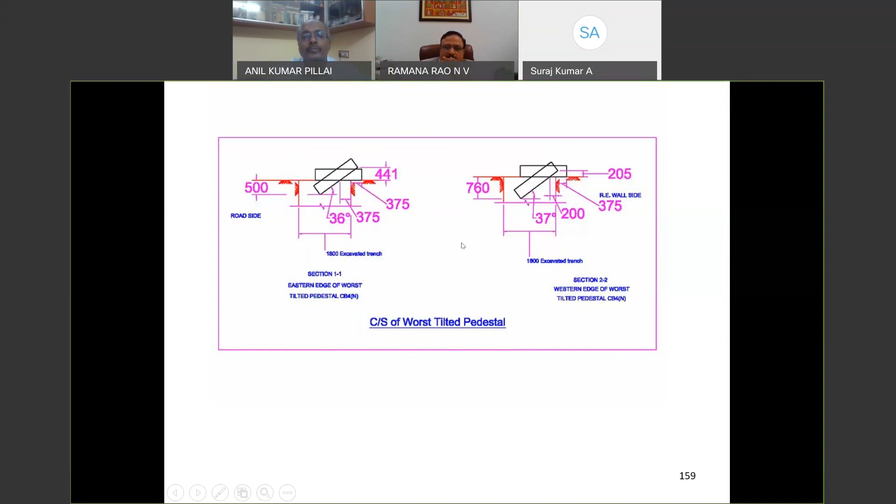So I'll show you the actual picture. This is the pedestal system, the support system which tilted. The tilt was almost up to 37 degrees.

Again, this is a geotechnical issue. You have to make sure that you are resting on a proper soil with a proper base. If you don't do that, then you lead to all the problems. So you have to make sure that even the temporary bridges, supports, and all that, everything has to be done properly.

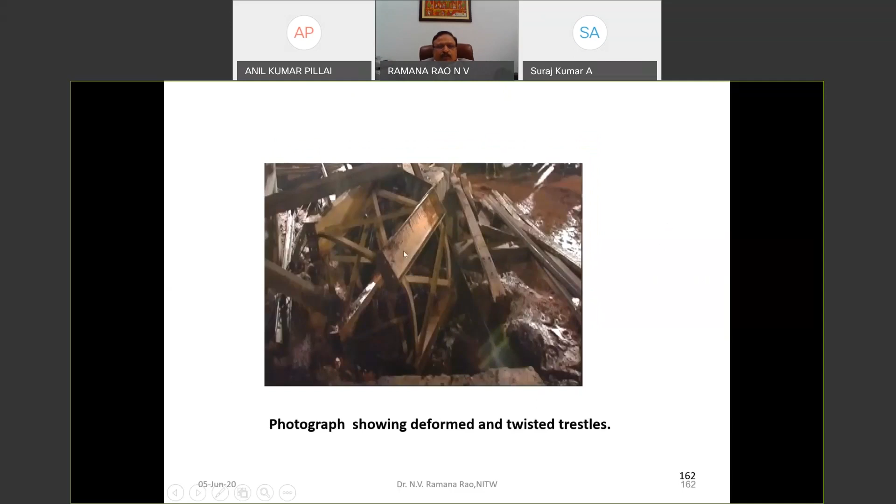And this is the collapse - trestles, how they have collapsed and bended. Unfortunately, heavy rain came and all the people were standing under the bridge to protect from the rain. And when it collapsed, one or two people died. So that was a very unfortunate part of it.

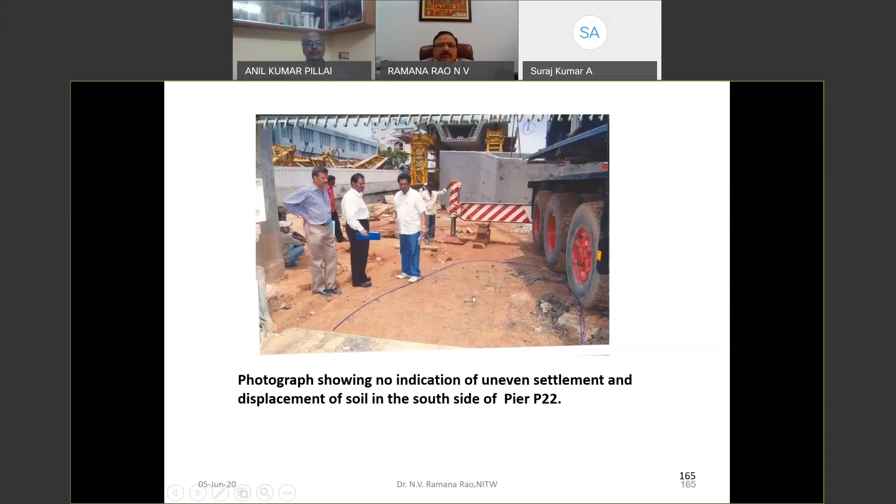These are showing no indication - wherever soil was good, there's no indication of settlement or anything. But wherever there was filled up soil, yes, there is. But while placing the pedestal, they did not bother to check whether the soil is proper or not. They just placed it like that.

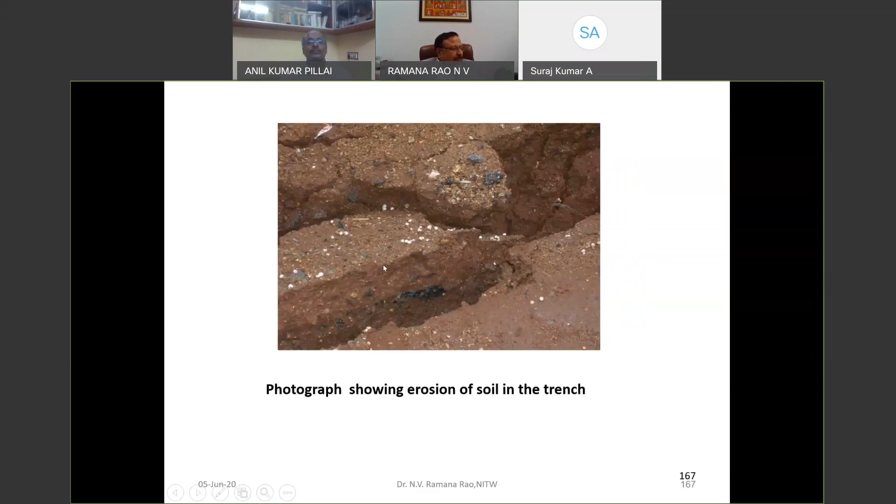But had they taken care of the proper compaction and provided a proper base, in case of doubt, they could have avoided all these things. So this is how it looks afterwards, and I can show you some examples.

This is a place where double pedestal was placed, nothing happened. But where there was a single pedestal placed on the trench, it collapsed immediately. And this is how the site looks - these are intact concrete bases, no problem. But this is how the tilting of the trestles led to the collapse of the segment.

And you can imagine, this much heavy weight falling on a car waiting under it during heavy traffic time. It happened during 6 or 7 p.m. It collapsed, and then once things collapse, all the TV channels get very active.

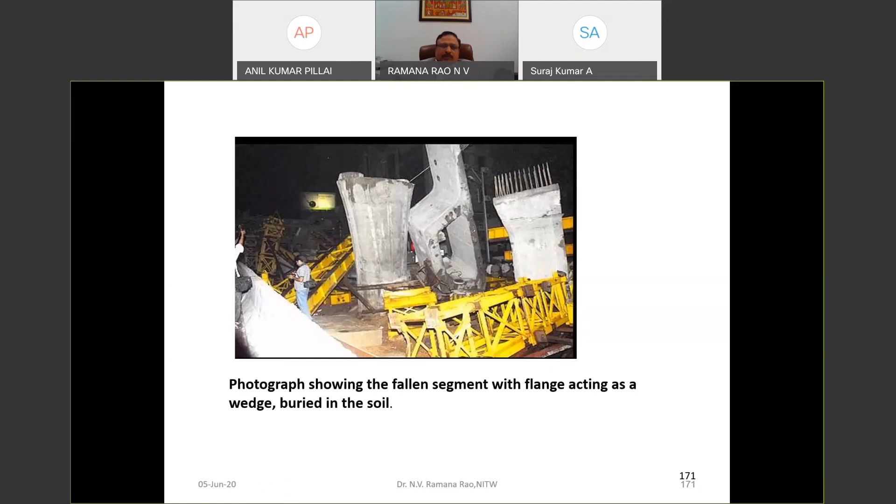They start telling their own stories about quality and this and that. But everything was perfect - this simple error of coordination between the excavation department of the water works and the GHMC. Everything is going on in front of them, but they didn't come back. So we have to be alert and agile, otherwise you lead to situations.

This is how it looks, showing the tilted base even before. So these are very sorry things, and this is how it looks. Anyway, later now it is all okay, and it's a wonderful project.

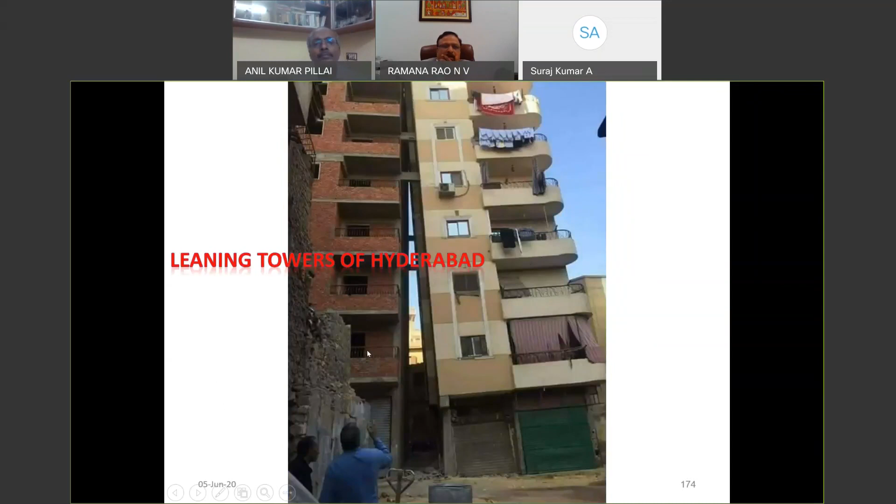Sometimes we build structures which are unengineered. See, we should not allow these things - the municipality should not allow it. Because what happens, I call this the leaning towers of Hyderabad, because they are leaning on each other. But they are creating huge problems. Something happens, small shaking, this will collapse, and so many residents die.

And this is a typical example - if you want a high building, go for proper designing and all that. This is another one in Malakpet, I call it Burj Malakpet to compare with Burj Dubai. This fellow has built some 10-story structure in a small piece of land of less than 10 feet by 10 feet. I don't know where he has provided the staircase and how he is reaching the top.

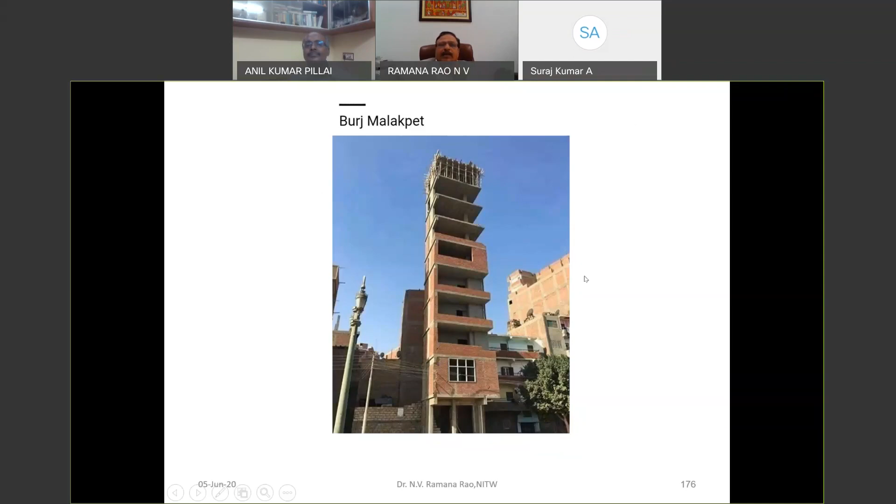But these are the type of structures which should be strictly banned, whether it is engineered or non-engineered, because any failure of this will cause huge loss of life in the surroundings, and it will get a bad name to the engineer. Any collapse will get a bad name to the engineers.

So what we have to do in my lecture, deliberately I have kept it very simple, because I am a professor, and I assume that many students will participate. So we should learn from the past, we should learn from our mistakes, and everything is important. I would end here because I have some time for questions and answers, so I deliberately ended at 11:55, because the organizers gave me time until 12, so I have to do it.

To engineer is human, to err is human, but to err as an engineer can be dangerous. So therefore, we have to make sure that we are very much aware of the simple things at site, and make sure that our structures are safe and secure from all angles.

In ancient days, the laws were very strict. Today, if something fails, there's an inquiry, but nothing happens. At that time, Hammurabi was the ruler of Babylon. He said if a builder builds a house and it kills its owner, then that builder should be put to death.

So that was strict, and everybody was very careful in every aspect. But today we've got so many disciplines, one is not knowing what the right hand is doing, the left hand doesn't know. So coordination is very, very important among engineers. That is what is very important.

So what I would like to end my lecture with is, no matter how many times you have done a job before, be sure to think the whole thing through before you start. Everything should be revisited, checked at site, and then allowed to proceed.

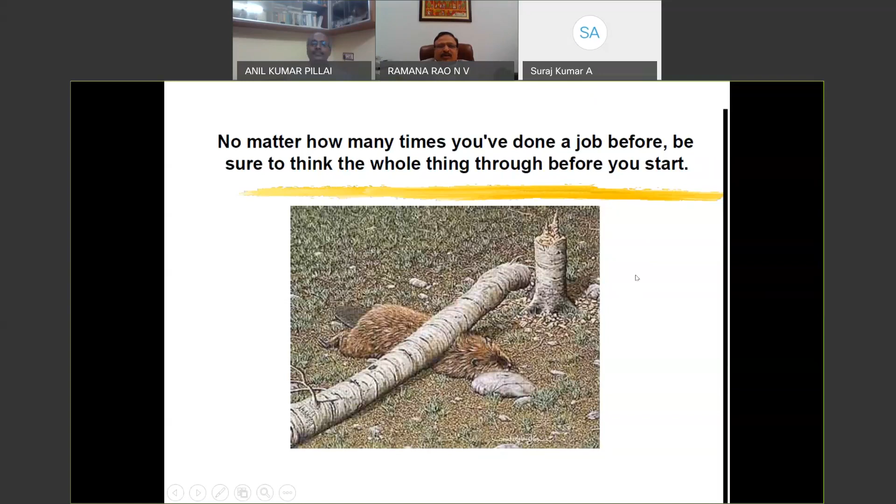I know there are very senior people participating, so for them this may look very simple, but my target audience was my students and others interested in entering practice, for their benefit. We should all understand that whatever we do, like a beautiful building, should remain beautiful for a long time. That should be our objective.